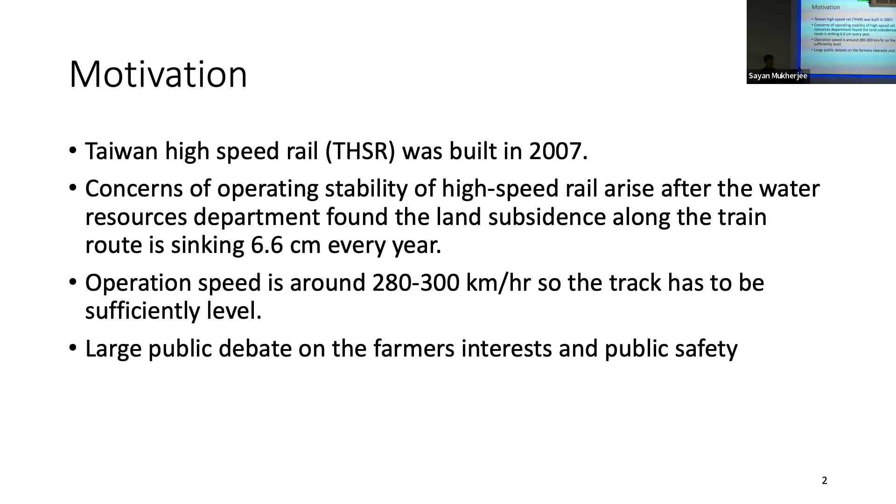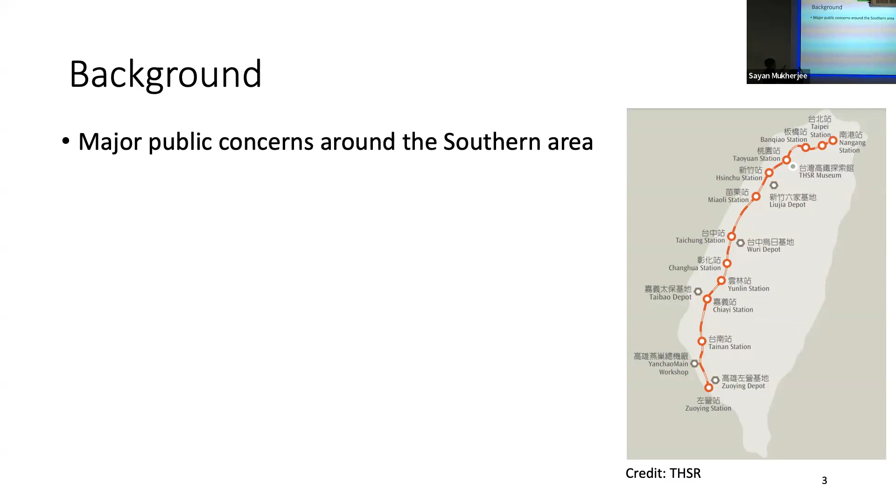So this is the map of the Taiwan high-speed railway. And as I said before, there's major public concern around the southern part, particularly the Yunlin station, which is in the middle around there. And then, 1 centimeter is considered very dangerous to the high-speed railway operation.

And then the Taiwan high-speed railway company uses traditional geodetic monitoring to manually monitor the vertical subsidence along their tracks when the train is not operated, like at midnight. So they'll climb up to the tracks, and then they'll do vertical optical leveling on the tracks at midnight for 4 or 5 hours. And they will do that occasionally, like once a month. And this is very time consuming and labor intensive and expensive.

And also at that time, this problem caused the public to panic, and even when the high-speed railway company came out and assured people that there is no safety issue, people wouldn't understand and wouldn't believe. So it's important for us to find a way to measure that subsidence value other than this method.

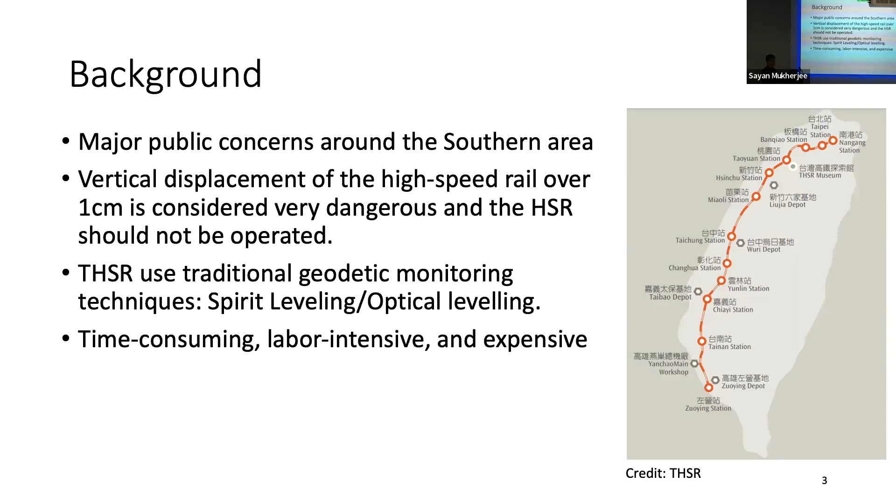So I came up with a device: an accelerometer with a laptop. This idea actually came from the Quake-Catcher Network. So I got inspired by the Quake-Catcher Network. They use laptops as small seismometers placed in every household to measure earthquakes in the California area. So I want to utilize this device to help me measure the vertical land subsidence of the high-speed rail.

So first, I will test the reliability of the device, and then the data is recorded by the laptop with the Quake-Catcher Network Live. So there's a 2-axis accelerometer inside the laptop. And then I will do the calibration of the accelerometer before measuring the data. Also, I will correct for the gravitational acceleration for the longitude and latitude of the location on the Earth.

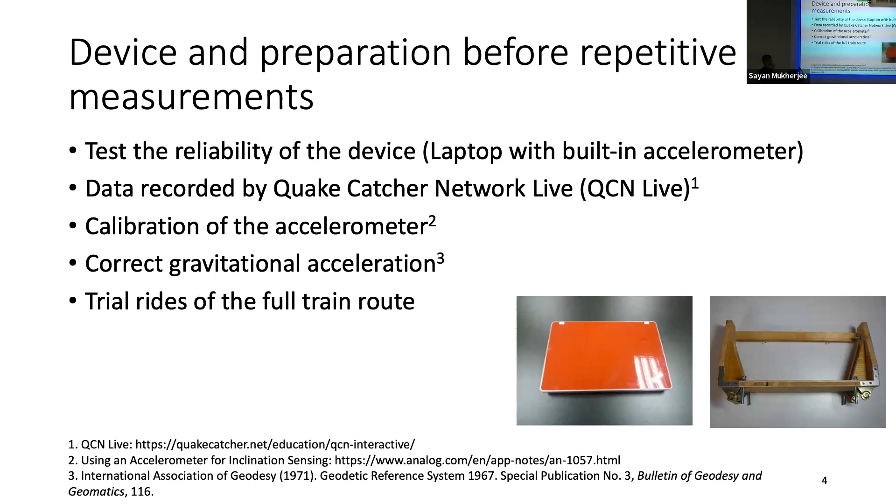And first, I will go for trial rides of the full train route from the first station of the Taiwan high-speed railway to the last station, which is from north to south, and then I'll go from south to north. So I will record the Z component of acceleration on the route from Taipei station to Zuoying station, which is from north to south. And then I will also record south to north.

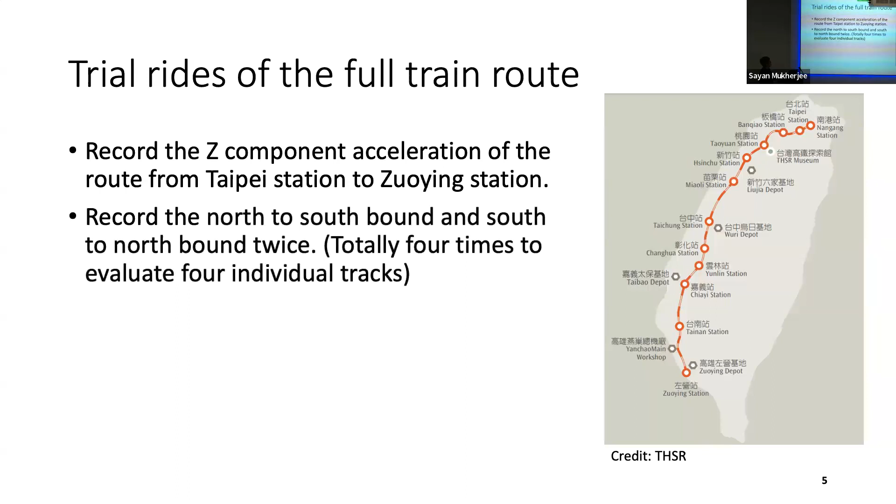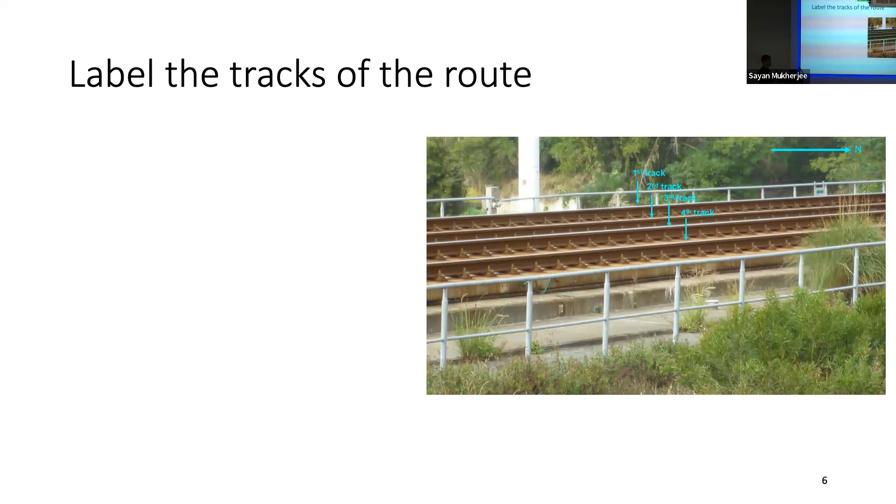So because there are 4 tracks for the Taiwan high-speed railway, you have to measure each track individually. Each track may have different values of subsidence distributed along it. So I will label the tracks for my convenience to record which track I'm recording and which direction I'm going. So we'll have tracks 1, 2, 3, 4. The first and second tracks are northbound, and the third and fourth tracks are southbound. So the trains always go on those tracks for south and for north.

So this is the device inside the train. I will have a handheld GPS. The device will be placed on the floor of the first car in the direction of travel. So for southbound, I will place it in the 12th car, and for northbound, I'll place it in the first car. So you don't have the effect of the train connections that cause more chaotic vibrations.

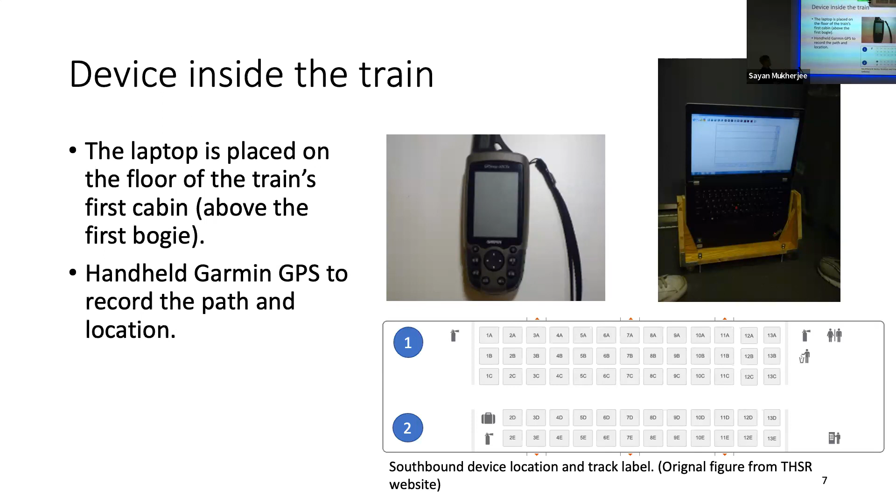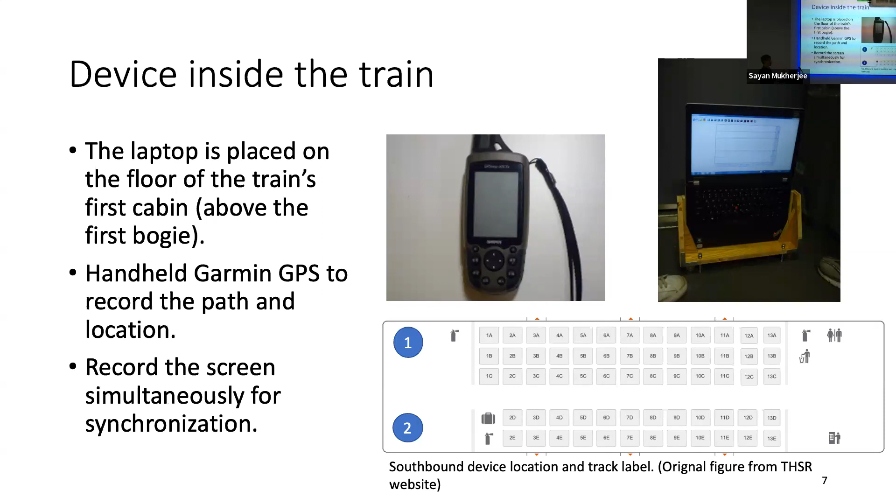So I place the accelerometer with the laptop on the trolley, placed vertically on the first bogie, which is in the very front of the train, behind the driver's cabin. And then I have a handheld Garmin GPS to help me locate where I am, to find the location that has the subsidence value. And I also record the screen simultaneously for synchronization, so when I go back and look at the data, I can synchronize where I am and where the data is.

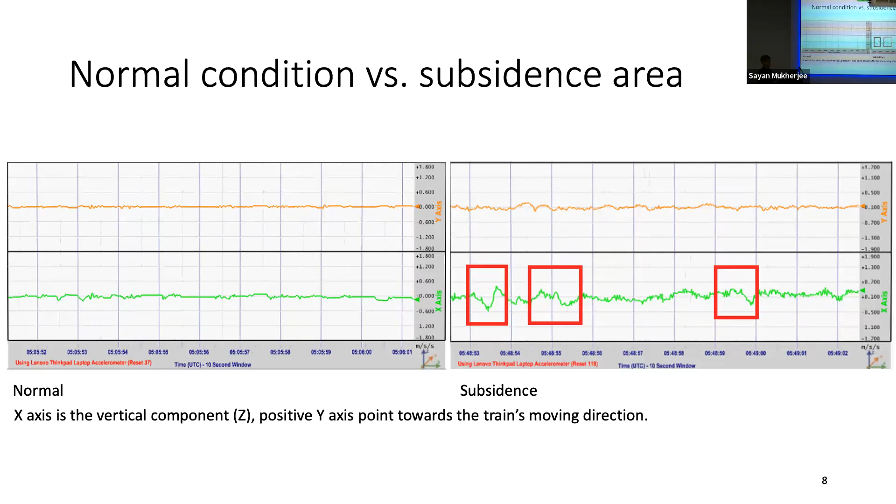So this is the normal condition versus the subsidence area. On the left, you have a very calm record. The green is the Z component, and the orange is the Y component, which is the direction the train is going. So if the train is accelerating, the data recorded in the y-axis is positive, and then negative when the train is decelerating. And the green one is the vertical component. So you can see on the right some area that has strong motion in the car, and you can record that with the accelerometer.

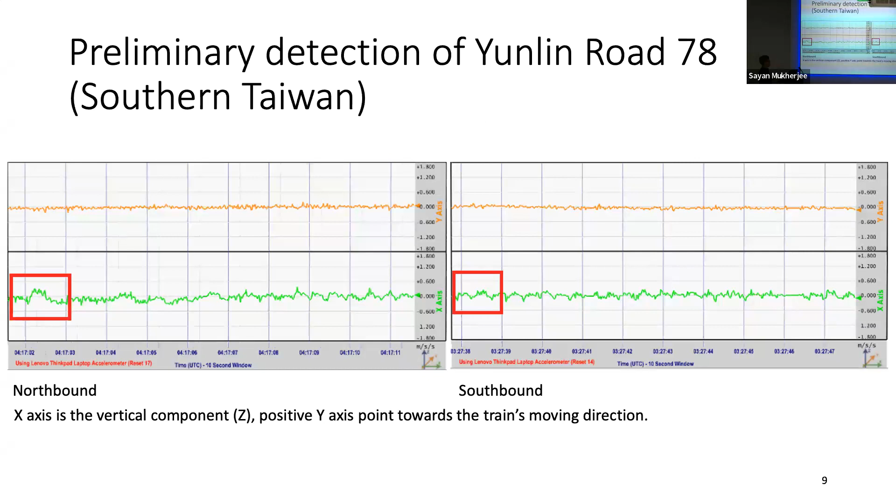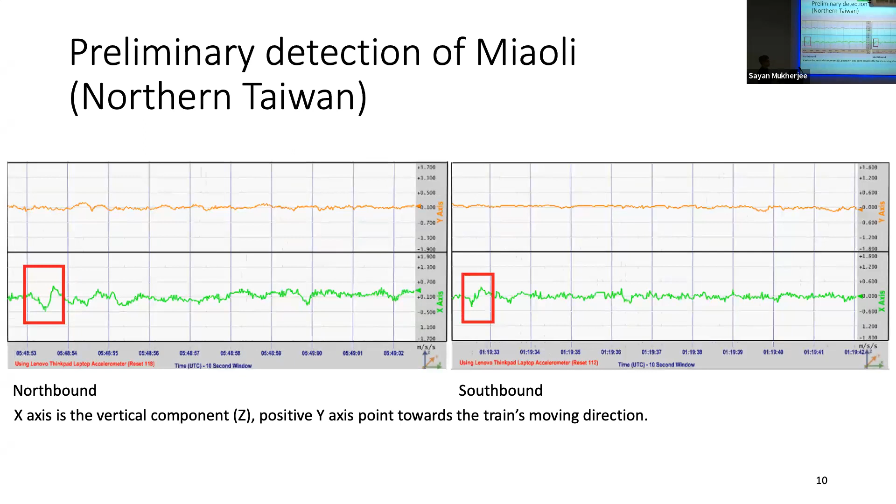So this is the preliminary detection of the southern part, where you can see there's some subsidence area that causes vertical displacement, but it's not very big. And we also found that it's not as the media claim, that the southern part is more dangerous to the train. It's actually the northern part that has larger subsidence value. So although the southern part of the country has large subsidence, it actually doesn't affect the train. And there are some places we didn't notice that have larger acceleration values for the high-speed railway.

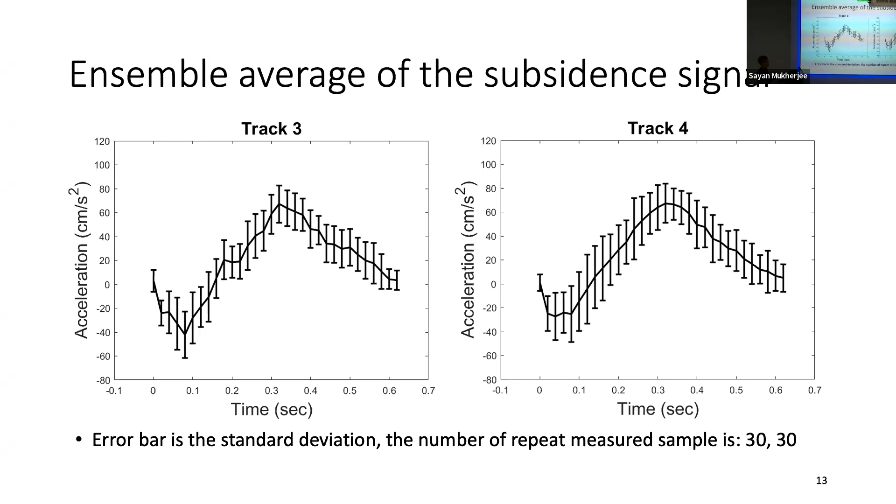And then we calculate the subsidence value from the spectrum of the acceleration data, and divide it by the square of its corresponding frequency. So we get the displacement, and we can get a rough estimation of the subsidence value at that location within that time frame. Track 1 and track 2 are around 0.65 centimeters, and the error, calculated against the non-disclosure manual measurement data from the Taiwan High-Speed Railway, is 1.56% and 1.45% for track 1 and track 2.

And for track 3 and track 4, the subsidence value is underestimated a little bit. The reason is that when the suspension system is still functioning properly, the damping effect of the whole train coupling with the bogie, with the air spring, the whole nonlinear system, and with the ground and the track, has to be considered. So you can adjust that, correct the damping effect, and then have a higher subsidence value that matches the manual measurements.

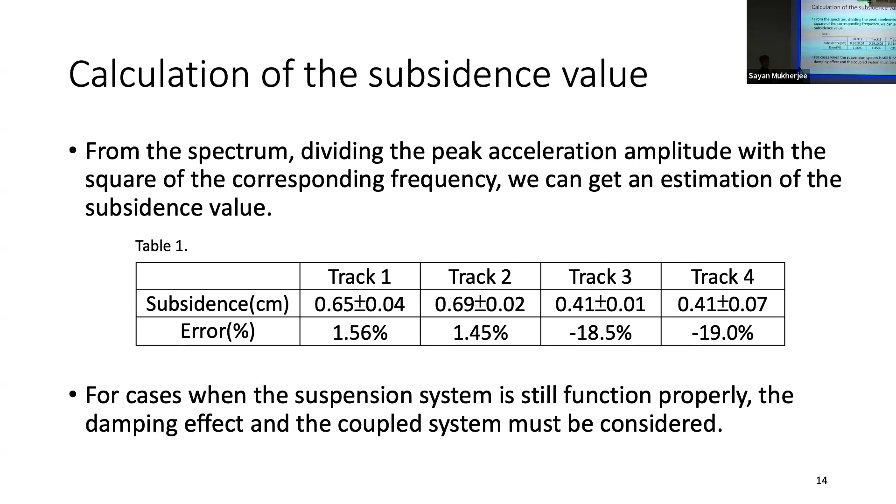So we also went on trial rides and discussions after we had our results, not published in a journal, but some media found out and reported it. So they invited us to go with them and have trial rides at other on-site measurements, to compare and prove that our method is actually working. So we went to other places where they have measurements, but we don't know the measurement values. We just had one ride, calculated the result after that ride, and the result was comparable to their measurements.

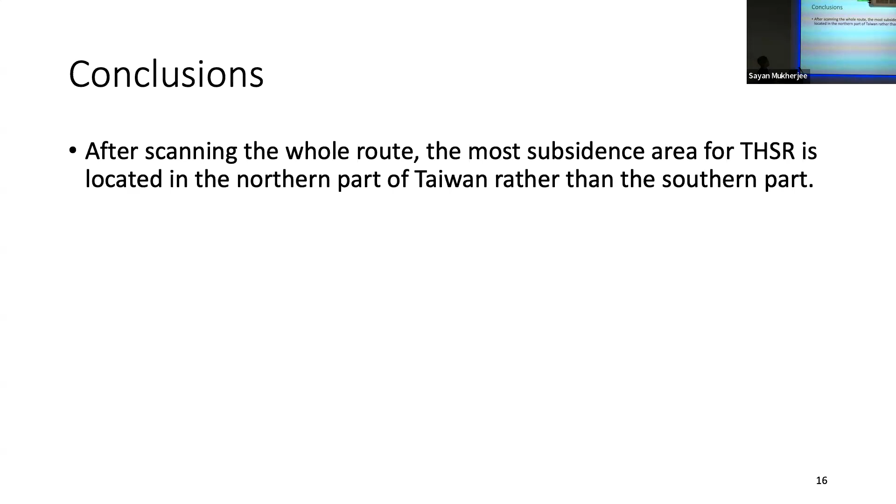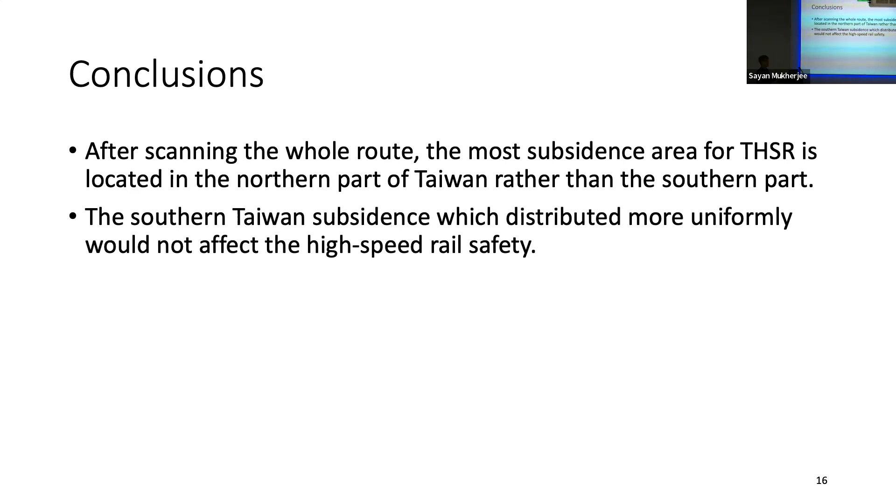So the conclusion is, after scanning the whole route, the most subsidence area for the Taiwan High-Speed Railway is actually in the northern part, not the southern part. Because the southern subsidence is distributed more uniformly, it does not create a sharp transition of displacement for the high-speed railway, which will not affect the safety of its operation. So we can apply a seismometer inside the train to measure the subsidence value, reduce the cost of the measurement, and it's less labor intensive. And I also got a patent, but it's expired. So yeah, that's it.